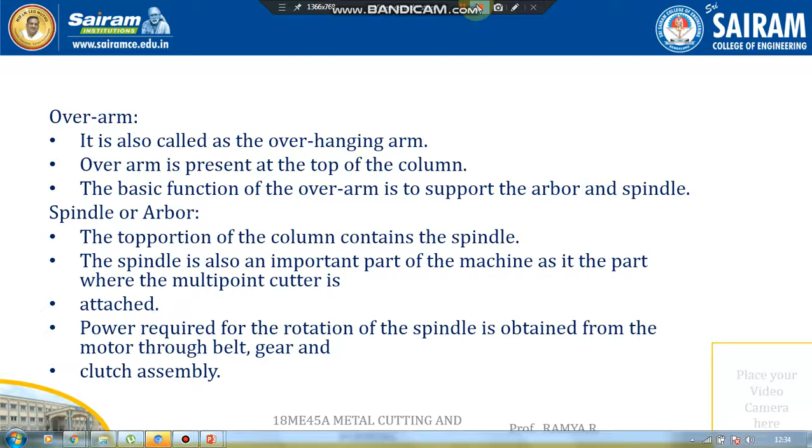And clutch assembly. The working principle of the milling machine: the working principle employed in a metal removing operation on a milling machine is that the work is rigidly clamped on the table of the machine and a revolving cutter which has multiple teeth is mounted on the arbor. The cutter revolves at a high speed and the work is fed slowly against the cutting tool.

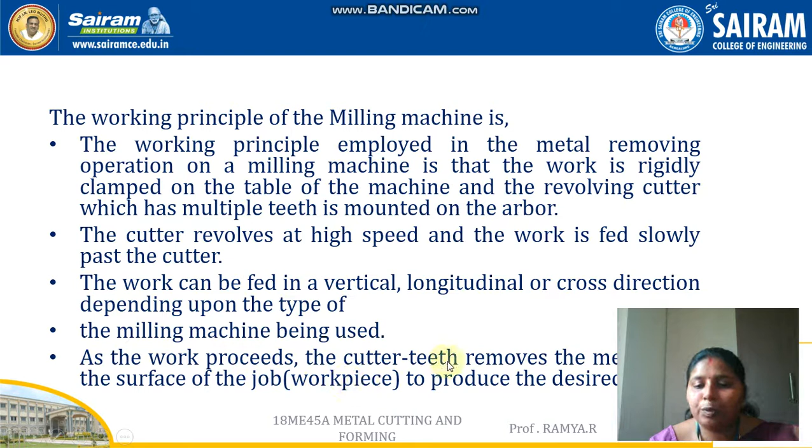The work can be fed in a vertical, longitudinal or a cross direction depending upon the type of the milling machine being used. As the work proceeds, the cutter teeth remove the metal from the surface of the work job to produce the desired shape. So there are many operations that can be done in milling.

It starts with the first one, plain milling or slab milling operation. The plain milling operation is the most common type of milling machine operation. Plain milling is performed to produce a plane surface or a flat surface, horizontal surface parallel to the axis of rotation of a plain milling cutter. The operation is also known as slab milling.

So if we take a glance at the operations done in the milling machine, the main purpose of the milling machine is to produce flat surfaces. It may be conical or anything, but it produces a flat surface. So that is the most important operation of milling.

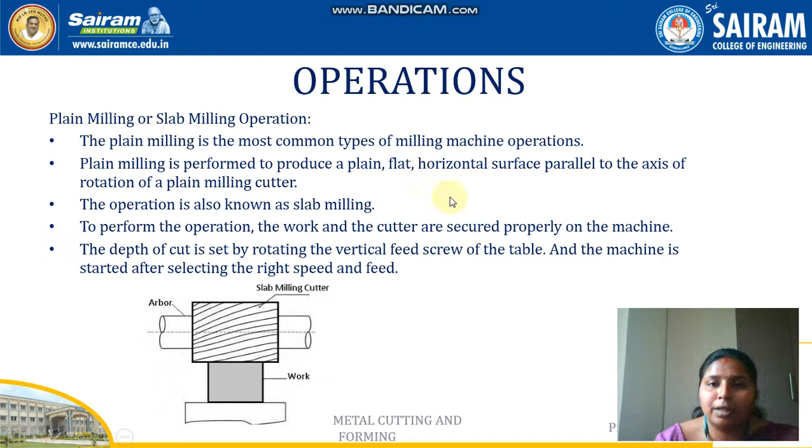And the next operation is face milling. This is also a simple milling operation. This is performed by a face milling cutter. For each milling operation, the cutter is named based upon the operation that is done. So if you are doing face milling, the cutter used is called a face milling cutter. It rotates about an axis perpendicular to the work surface, and it is used for producing flat surfaces. And this is a schematic representation of face milling.

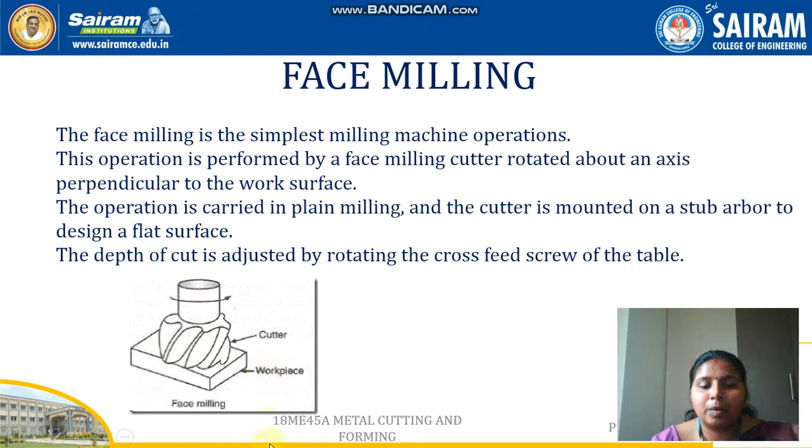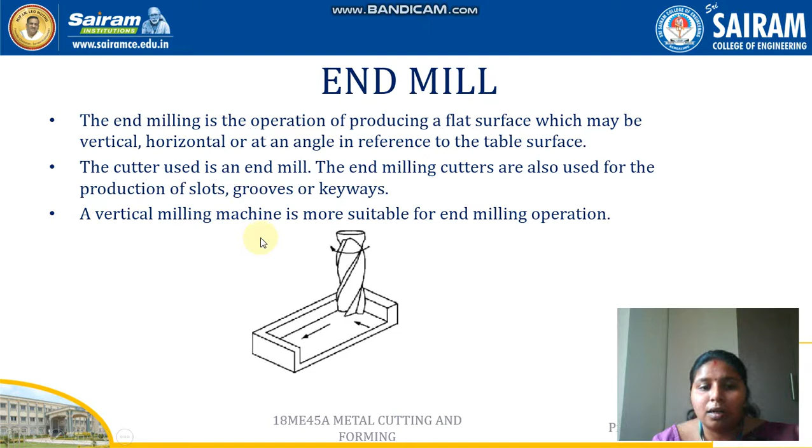The next one is end mill. End milling is also an operation used to produce a flat surface, maybe horizontal or vertical or at an angle in reference to the table surface. The cutter we use for this is called an end mill cutter, and it is also used for production of slots, grooves or keyways. A vertical milling machine is suitable for this end milling operation.

And the next one is slot milling. The operation of producing keyways, grooves and slots of varying shapes and sizes can be performed in a milling machine. It is done by using a plain milling cutter, a metal slitting saw, an end mill or a side milling cutter. The open slots can be cut by a plain milling cutter, a metal slitting saw or a side milling cutter. The closed slots are produced by using end mills.

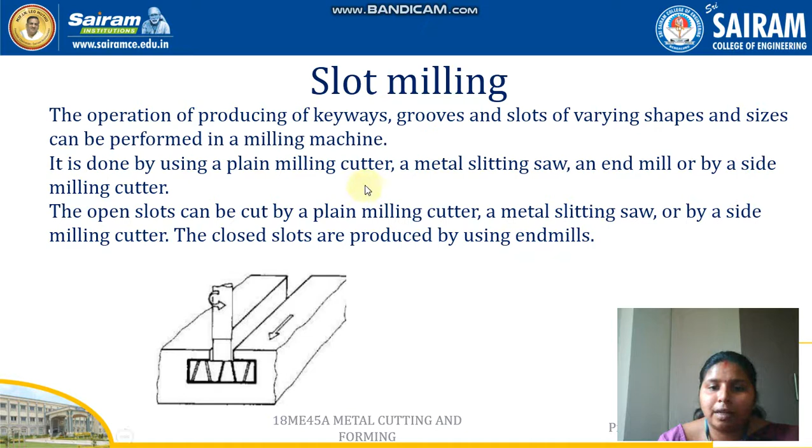So this is a schematic arrangement of slot milling, where this is the cutter used for producing the slots. According to the slot, the cutter also differs. This is a cutter used for producing T slots. For dovetails and other keyways, the cutter will differ.

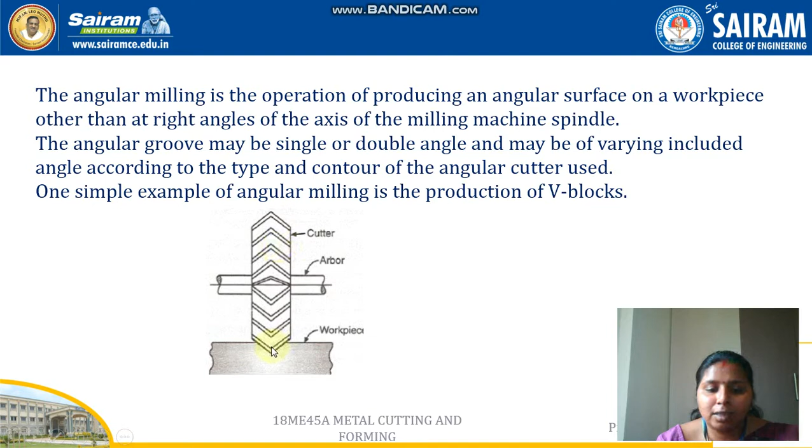And the next one is angular milling. This type of operation is used for producing an angular surface on the workpiece other than at right angles to the axis, and if we need a V shape, two cutters are joined together to form double angle V blocks. So here in this image, two cutters are joined together to produce V blocks. Or else if we need just a single conical surface, a single cutter is used.

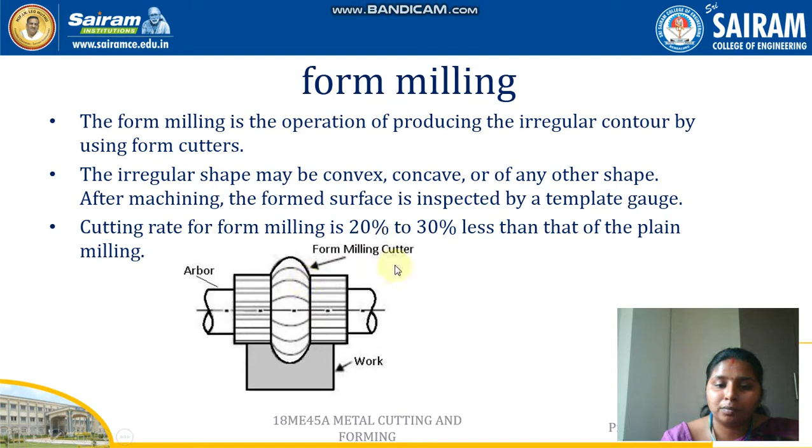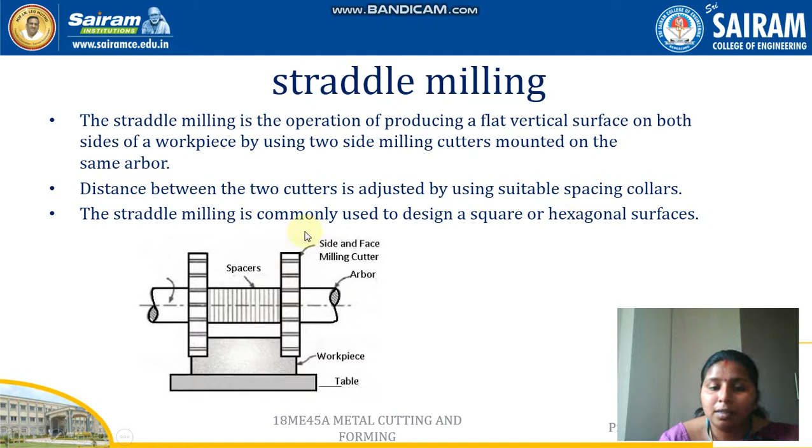The next one is straddle milling. This is an operation of producing flat vertical surfaces on both sides of a workpiece by using two side milling cutters mounted on the same arbor. The distance between the two cutters is adjusted by using suitable spacing collars. Straddle milling is commonly used to produce square or hexagonal surfaces, and this is the cutter used for straddle milling.

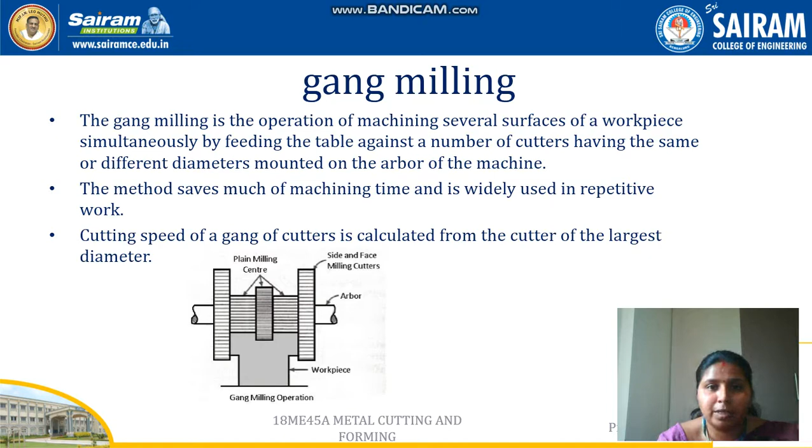And the next one is gang milling. Gang milling means two different cutters are mounted on an arbor, and simultaneously two different operations take place on a workpiece. This is the arrangement of a gang milling machine.

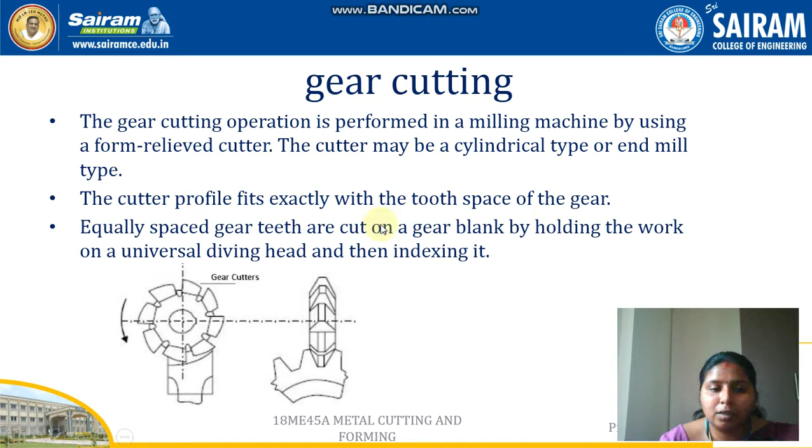And the next one is gear cutting. The ultimate aim of a milling machine is to produce gears and profiles. The gear cutting operation is performed in a milling machine by using a form relieved cutter. The cutter may be a cylindrical type or end mill type. The cutter profile fits exactly with the tooth space of the gear. Equally spaced gear teeth are cut on a gear blank by holding the work on a universal dividing head and then indexing it.

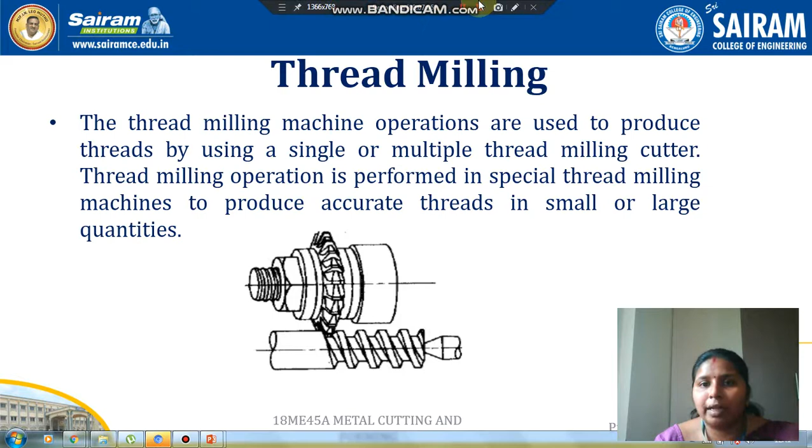And the next one is thread milling. Thread milling operations are used to produce threads by a single or multiple thread milling cutter. The thread milling operation is performed in special thread milling machines to produce accurate threads in small or large quantities. This schematic shows a cutter producing external threads in a workpiece. This milling can be done in a lathe machine also with the help of this cutter. So this is about the operations that can be done in a milling machine.

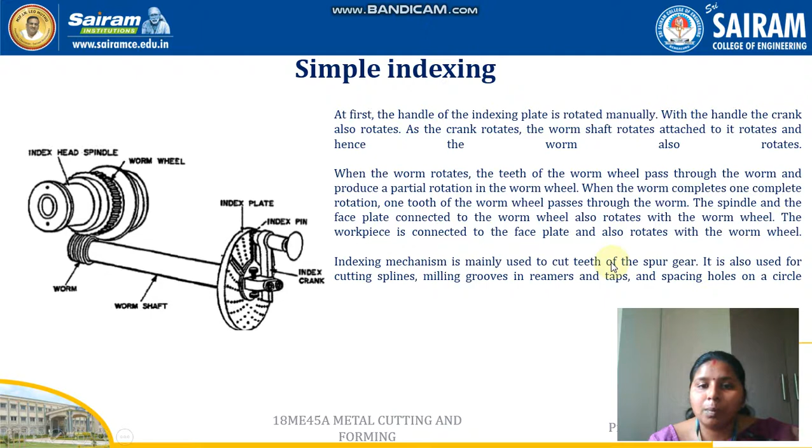When the worm completes one rotation, one tooth of the worm wheel passes through the worm. The spindle and the faceplate connected to the worm wheel also rotate with the worm wheel. The workpiece is connected to the faceplate and also rotates with the worm wheel. The indexing mechanism is mainly used to cut teeth of spur gears. It is also used for cutting splines, milling grooves in reamers and taps, and spacing holes on a circle. So this is about the simple indexing mechanism.

Differential indexing is used where a fraction of a crank rotation can be achieved without using the holes of indexing plates. This situation occurs when the workpiece has to be divided into a number of divisions greater than the maximum number of holes an indexing plate can have. Indexing plates can have at most about 66 holes. For more than 66 divisions, the differential indexing mechanism is used. So this is about the indexing mechanisms that are used in a milling machine.